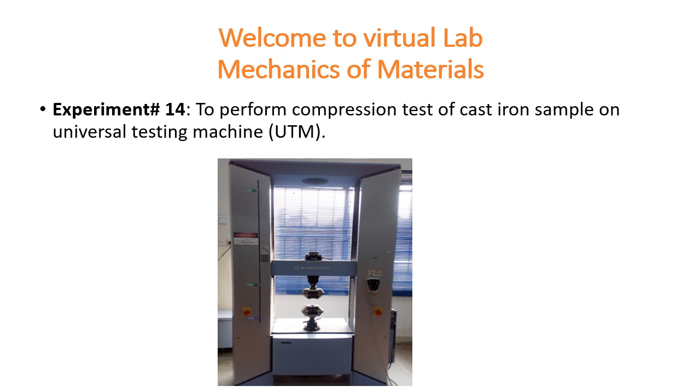So before starting the experiment physically in the lab, you are advised to wear clear safety glasses with side shields. Hazard is flying debris. A broken piece can fly and injure you. So it's safe to wear the safety glasses and personal protective equipment as you can. And safety glasses are a must for this experiment.

So inspect the work area, walk around the machine looking for debris and ensure the proper lighting to avoid slips, trips and falls. So see the area around the machine. Keep the work area around the machine free from scrap, dust, oils and grease. The hazard is you can slip and fall. So it's safe to clean the area around the machine. If you can see any piece, pick it up and put it in the dustbin.

Before setting up and using the equipment, always do these common checks. See all the electrical parts and leads for damage or wear. If you observe any damage or wear, before performing the experiment, this will be settled by the lab technicians. Check the electrical connections are correct and secure. Check all the components are secured correctly and fastenings are sufficiently tight. These are simple checks, and it's safe to wear the safety glasses. The area should be clear around the machine.

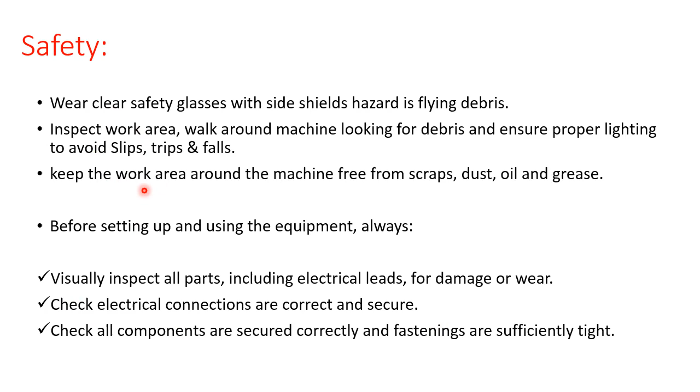So the compression tests are conducted by loading the test specimen between two plates, and these two plates are available in the universal testing machine. By means of this we apply the load on the specimen. By moving the crosshead together, the test specimen is compressed and deformation versus the applied load is recorded. So we compress the specimen in the universal testing machine and see the behavior of the material, and this is a graph of stress strain.

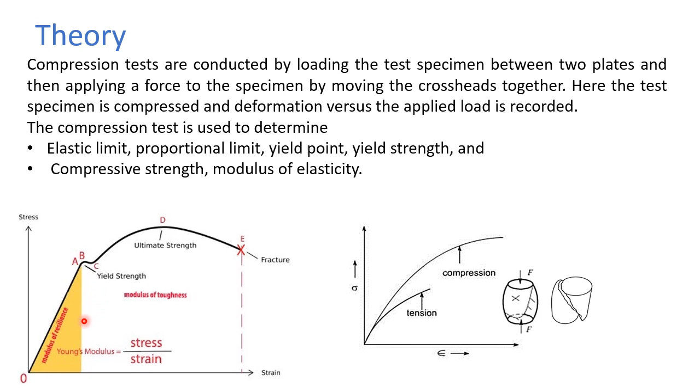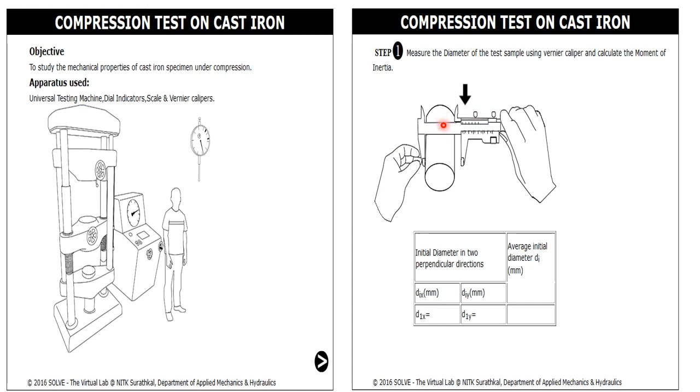We will perform this experiment by using a simulator. This is the vernier caliper. You will measure the dimension of the specimen by using the vernier caliper, and see here, we will measure the dimension and then we'll measure the moment of inertia by using this formula. And using the vernier caliper we will measure the length of the specimen. This is the compressive specimen, and we will measure the dimension by using this vernier caliper.

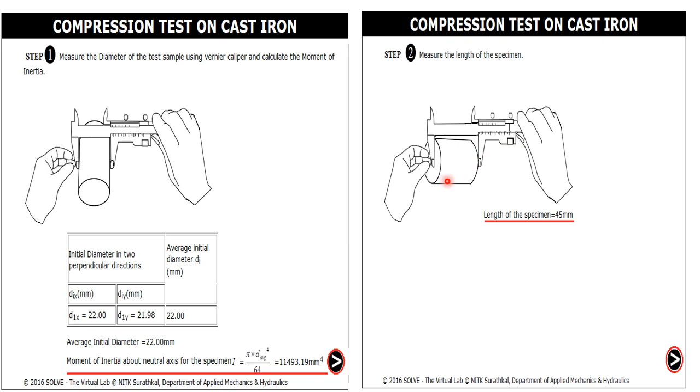After taking the dimension, we place the sample on this platform. This is the universal testing machine, and these are the cross heads of this machine, and we place the sample between the cross heads. So in step 4, we will start the loading process. We note the deflections by the dial gauge and corresponding load intervals, and the shape of fracture of brittle material is studied in this machine.

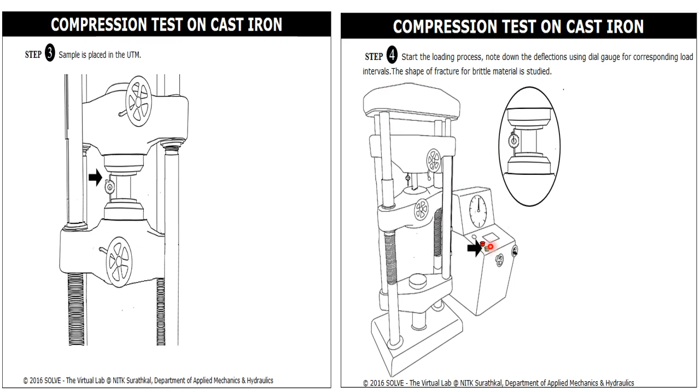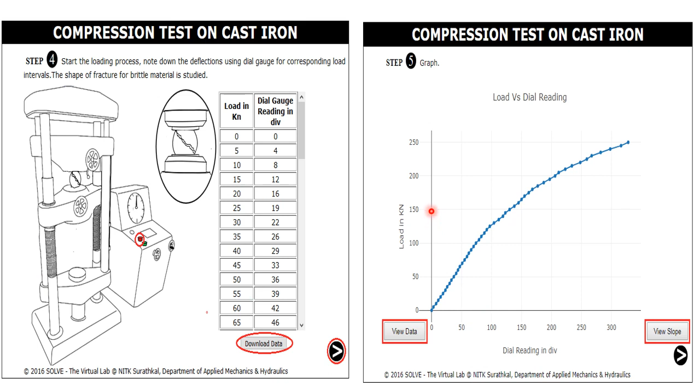So you can see here, this is the specimen, cracking has started, this material fails, and we will measure load in kilonewtons and the dial gauge reading; you can see here, this is the dial gauge. So after recording these values, we will download the data and we can plot the graph. This is load and this is the reading of the dial gauge. You can see here the slope, and all the data which is recorded in this simulator.

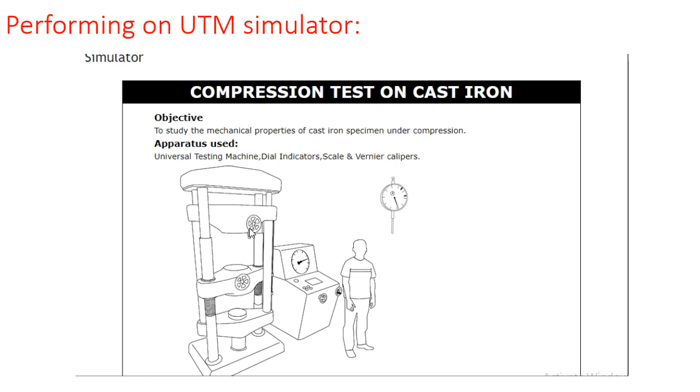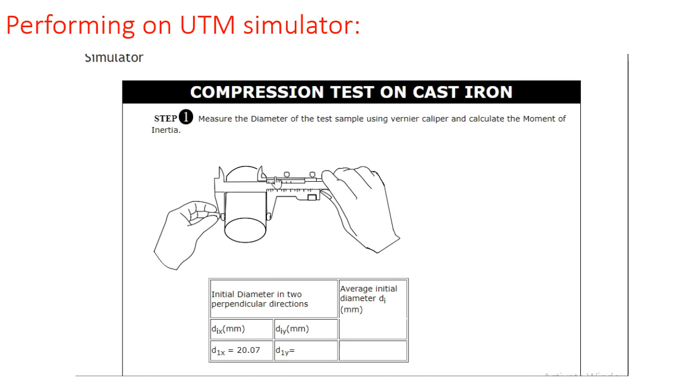So here is our simulator for the universal testing machine. This is the universal testing machine, and this is the dial gauge. We place the sample in this universal testing machine. By using the vernier caliper, we will measure the dimension of our specimen. So this is the vernier caliper. We will take the dimension of our sample by using the vernier caliper. See here, average initial diameter is 20 millimeters.

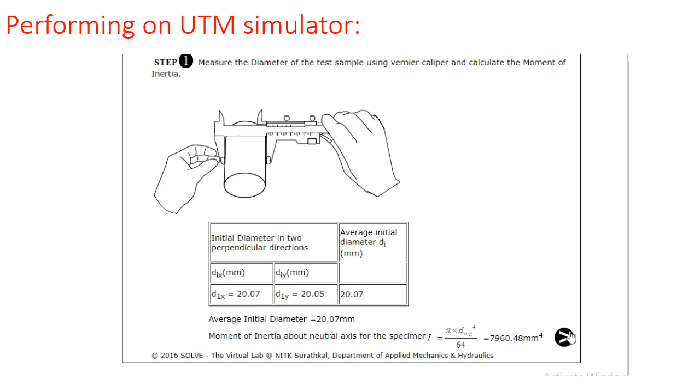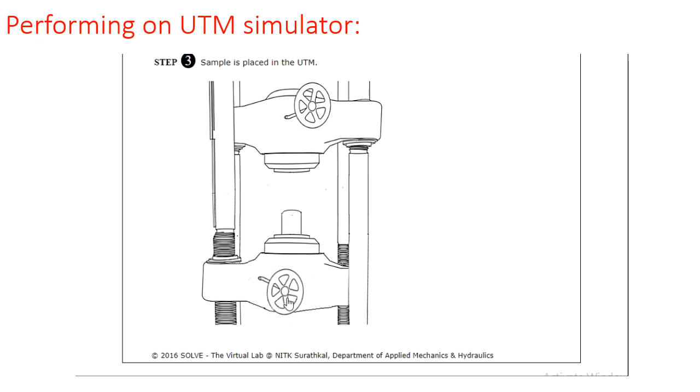So we will proceed to the next step, and we will measure the length of the sample. Length of the sample is 45 millimeters. So in the next step, we will place the sample on this platform of the universal testing machine. We will drag the sample and put the sample here. So this sample is in contact with both cross heads. So we will tighten this screw.

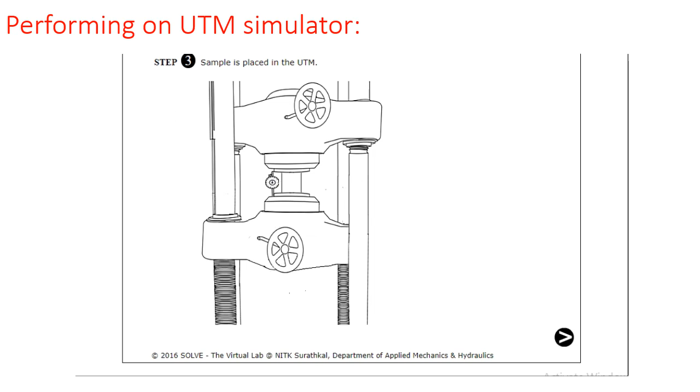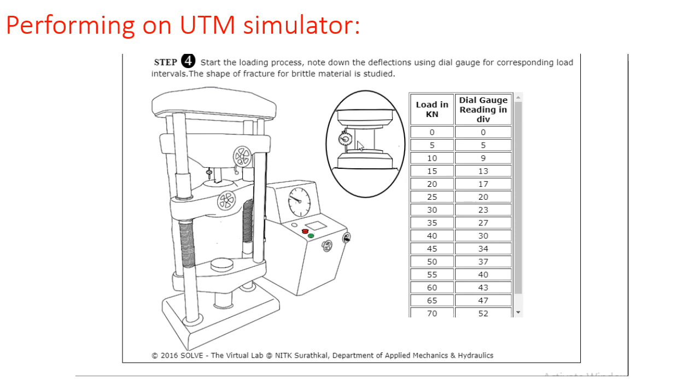We will use it. So we move to the next step. The sample is fixed in the universal testing machine. Now we apply the load on this sample. So we apply load, and compression of the sample is starting. You can see here in this view. The sample is compressing as the load is increasing.

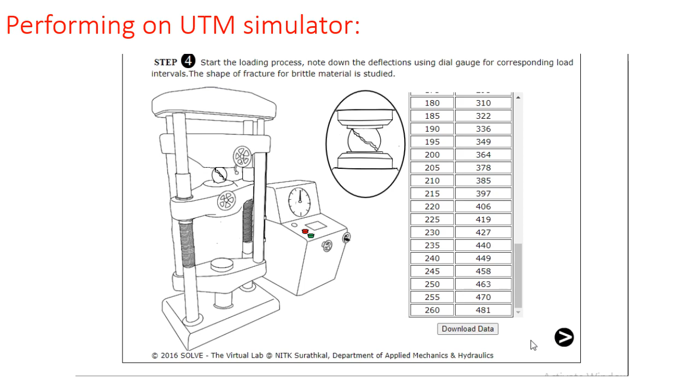So a crack has started. The sample is cracked and it will fail in a few moments. So the sample has failed here. You can see 260 kilonewton load is applied, and you can see here the reading on the dial gauge. Okay, now you can download the data from this point and we will move to the next step.

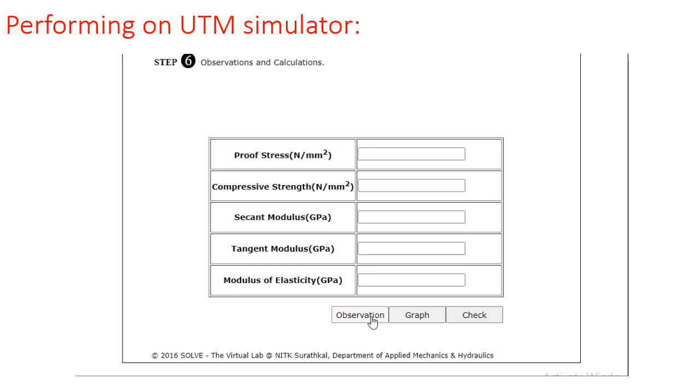We can check the graph. You can see here the graph, 260 kilonewtons. It fails at 260 kilonewtons. Now you can see here the different regions. This is the elastic region. After this, the plastic region starts, and this is the failure point. And you can see here the observations and calculations.

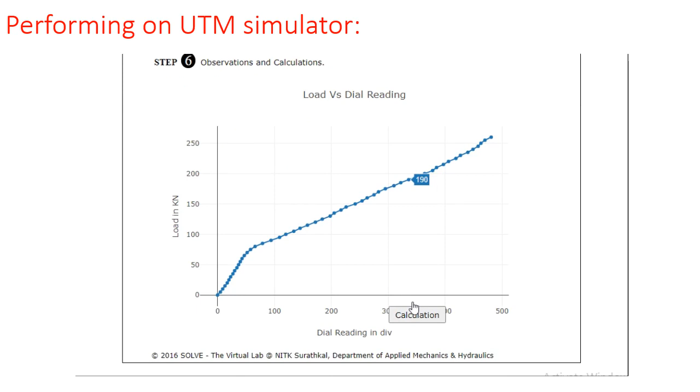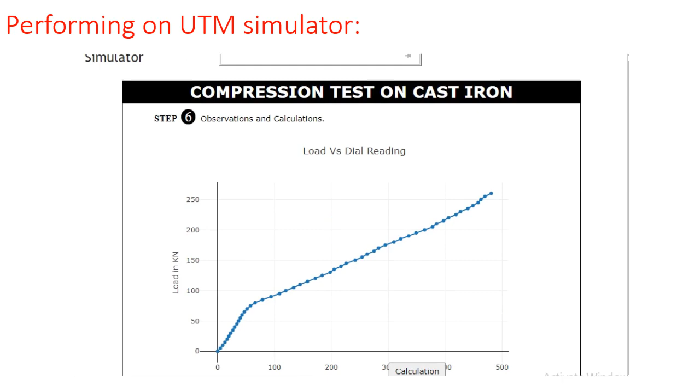So measure the modulus of elasticity using the stress and strain values of this data. So record the data, analyze, and calculate the modulus of elasticity for this compression test of cast iron. So at the end, your task is to calculate the modulus of elasticity and then visualize and inspect from this graph the proportional limit, elastic limit, yield point, and ultimate tensile strength of this specimen.

And this simulator is freely available on a site. I have shared the link. You can practice this experiment on this website, record the data, and complete your reports.